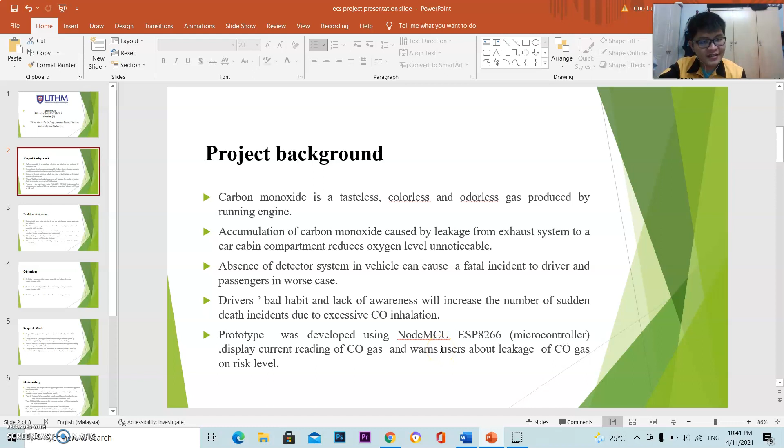Next, the problem statement. The sudden death cases while sleeping in the car has raised alarm among Malaysians and the authorities. Drivers and passengers have unfortunately suffocated and been poisoned by carbon monoxide while sleeping. The exhaust gas leakage has contaminated the car passenger compartment, especially in cars that have not been well maintained. Besides that, carbon monoxide gas leakage is hardly traced by the driver due to the absence of additional tools to detect its presence. Detecting the presence of carbon monoxide gas is a big issue nowadays. All these cases can be avoided if a gas leakage detector could be installed in every user's vehicle.

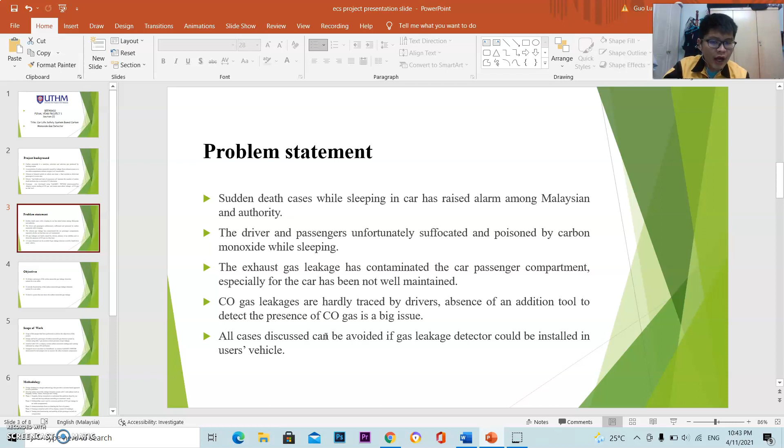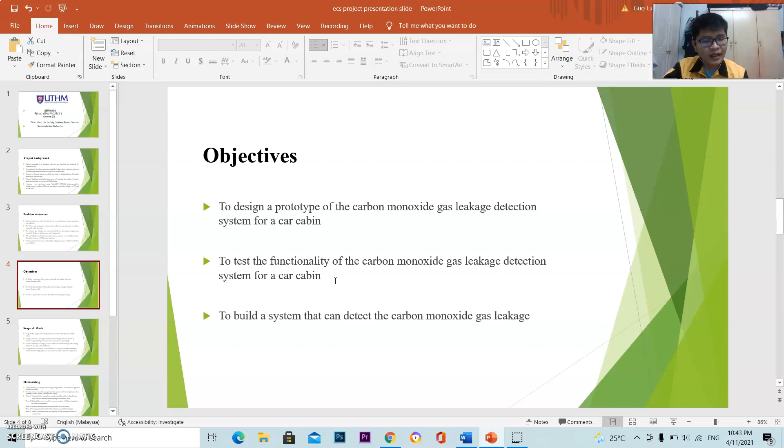Next, the objectives of this project. The first objective is to design a prototype of the carbon monoxide gas leakage detection system for a car cabin. The second objective is to test the functionality of the carbon monoxide gas leakage detection system for a car cabin. The last objective is to build a system that can detect carbon monoxide gas leakage. Next, the scope of work.

The scope of this project has been performed to achieve the objectives. We have to design and build a prototype of a carbon monoxide gas detector system using Arduino and the MQ7 gas sensor to detect the presence of gas leakage. Then we have to install an LCD to display the current carbon monoxide reading and a warning indicator using an LED and buzzer. Lastly, the design circuit was done on a breadboard to connect the microcontroller, the Node MCU ESP8266, using jumper wires to connect the other electronic components on the breadboard.

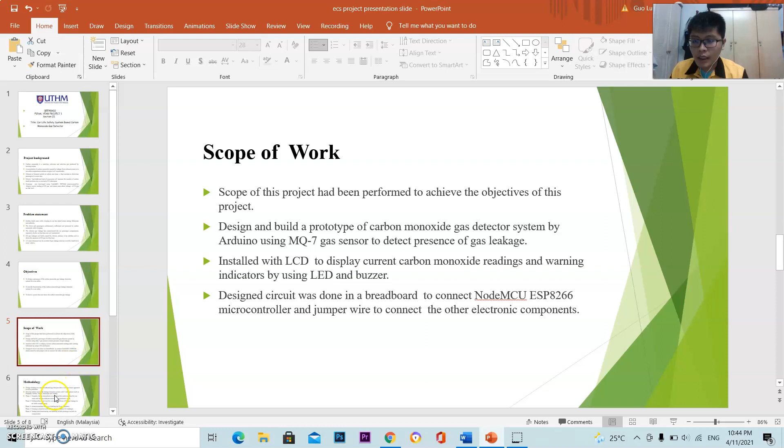Now we proceed to the methodology. Design thinking is a design methodology that provides a solution-based approach to solve problems. The developed carbon monoxide leakage detection system consists of 5 main phases: empathy, define, ideate, prototype, and testing. In phase 1, empathy, it helps the researcher understand the problem faced by the car user, which helps develop the solution according to customer needs.

Phase 2 is define. The purpose of define is to identify the user needs in overcoming the problem of carbon monoxide gas leakage in the car cabin compartment. Phase 3 is ideate, where the researcher focuses on detailing the flow of the system.

Phase 4 is the prototype, which will be installed together with the LCD so it can display the current carbon monoxide reading. The last phase, phase 5, is testing, where we test the functionality and usability of the prototype and its built-in components to ensure it functions well.

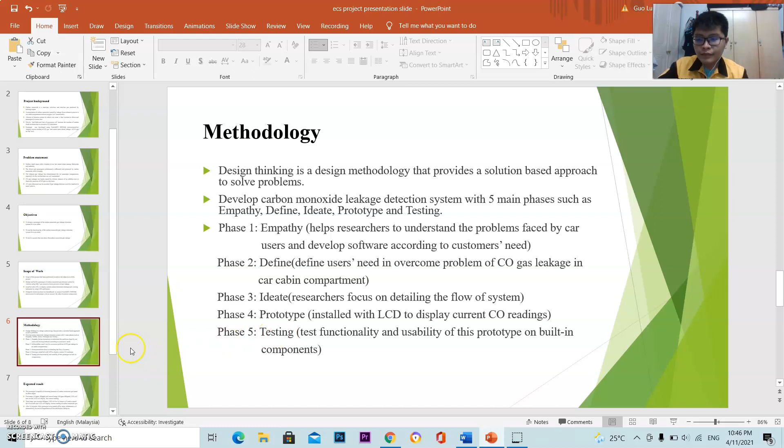Now, the flowchart of the COLDES, the Carbon Monoxide Gas Leakage Detection System prototype. This is the start button. The COLDES is in operation.

If yes, the gas is 0 to 150 ppm. If no, we continue checking for 151 to 400 ppm. If yes, the green LED will turn on and the LCD will display the reading as the safe stage. If no, for gas at 151 to 400 ppm, it continues to check that stage. If yes, the red LED will turn on and the LCD displays the reading as stage 1. If no, then it proceeds to the next stage.

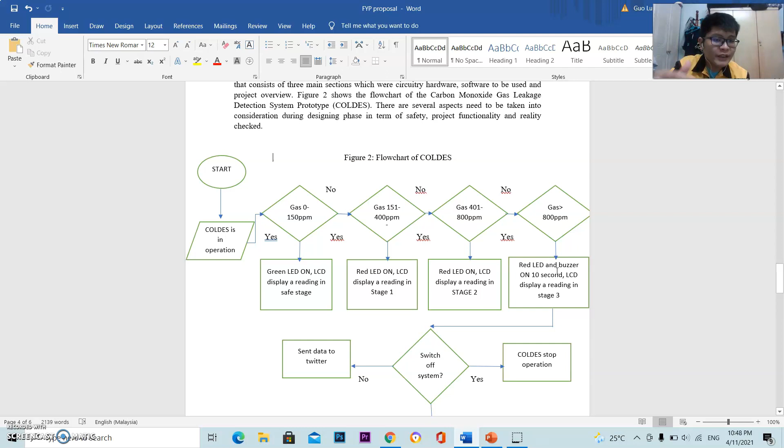Next is gas at 401 to 800 ppm. If yes, the red LED will turn on and the LCD displays the reading as stage 2. If not, it proceeds to check gas above 800 ppm. If yes, the LED and buzzer will turn on for 10 seconds, and the LCD will display the reading as stage 3. If the switch is turned off, and yes, the operation stops. If no, the data is sent to Twitter. That's all for the flowchart.

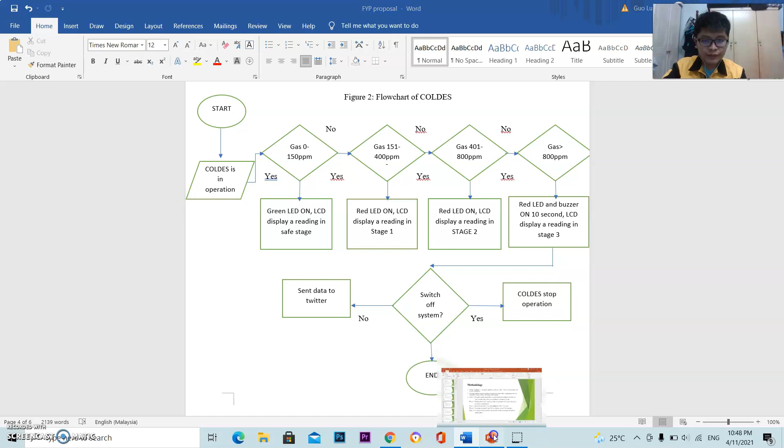Expected results: the prototype is capable of detecting the presence of carbon monoxide gas based on 3 stages. The first stage is 151 to 400 ppm, and the second stage is 401 to 800 ppm; for both, the LED will turn on and the LCD will display the current reading. For the third stage, when gas exceeds 800 ppm, the LED will light up, the buzzer will sound for 10 seconds, and the LCD will still display the current reading of carbon monoxide gas.

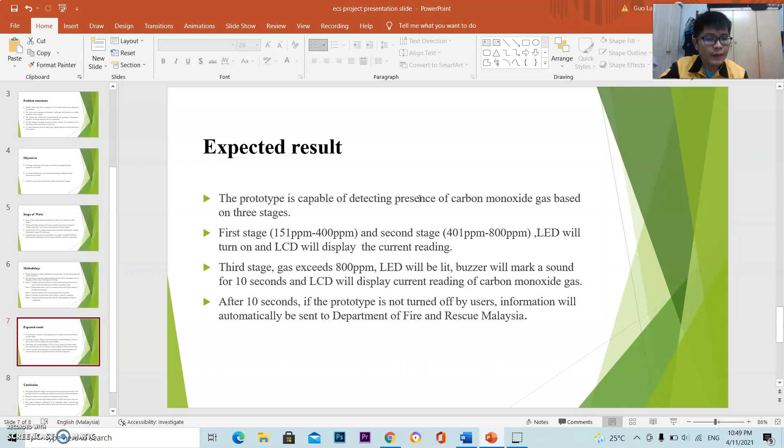After 10 seconds, if the prototype is not turned off by the user, the information will be sent straight away to the Department of Fire and Rescue Malaysia.